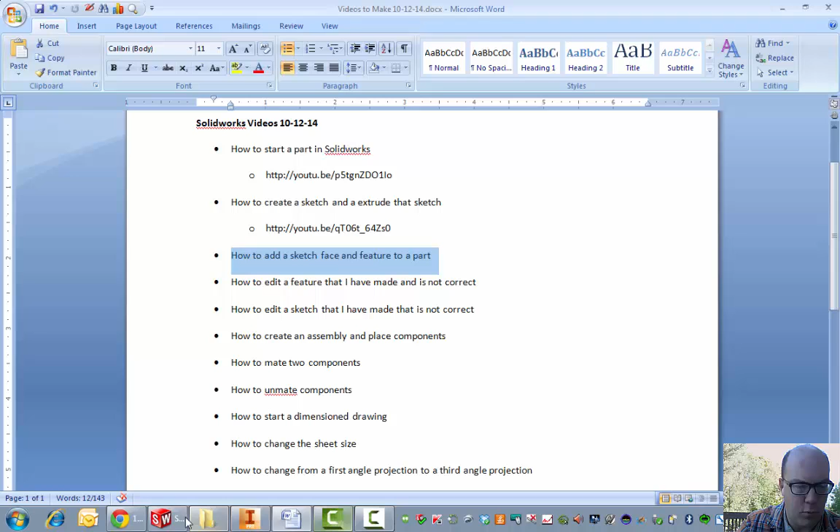Okay, so here's the third video we're going to talk about, and that is how to add a sketch face and feature to a part. Going to be pretty useful because everything you guys are going to do is not so simple as to do just a single face and then extrude it. You have to know that, but you're going to be doing a lot more things than that.

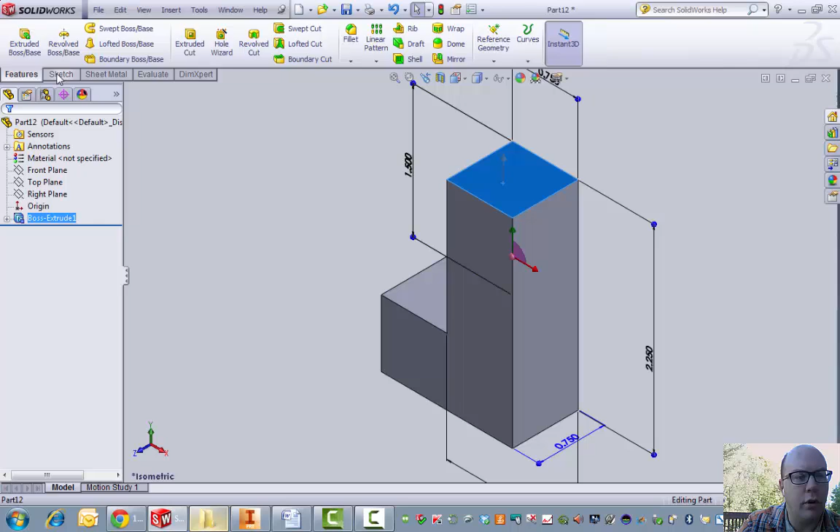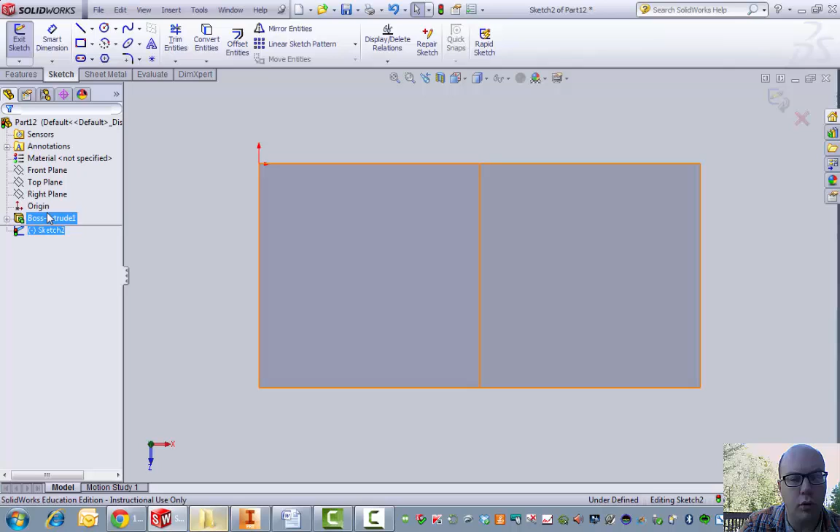So, first thing you want to do is you can click on a face, for instance, up here, and then we're going to click on Sketch right there. Now what we've done is, in our feature manager, in the design tree, we have an additional sketch. What that sketch is going to allow us to do is draw on that and then place different things on it. So one of the things I like to do too is right click, and then I will go Normal To, and you can see how it rotates the part and puts it right where you want it.

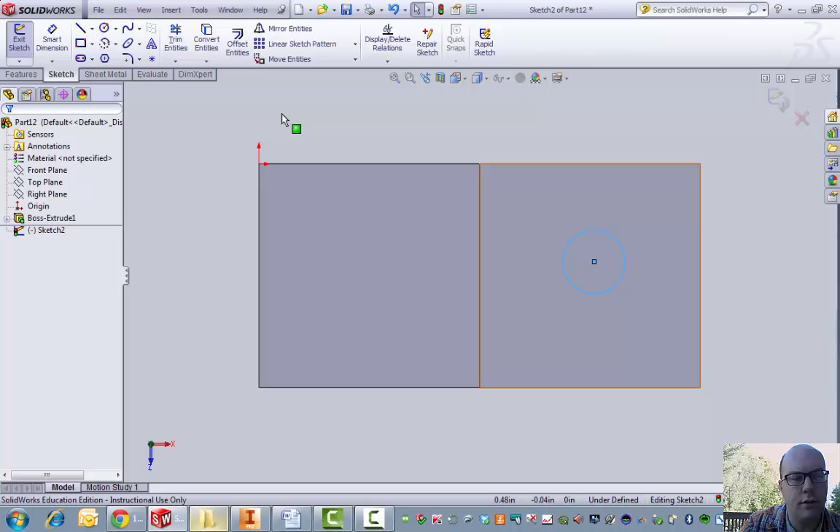So for instance, if we wanted to cut, bore a hole in it, one, you would need to know the location of the hole, but I'm just going to put a circle on here right now and then hit check mark, and it doesn't really matter where it is because I'm just showing you this feature here. And then what we're going to do is go to this extrude cut, for instance. Now with it I can go blind, I can go through all, for instance, and when I hit check mark,

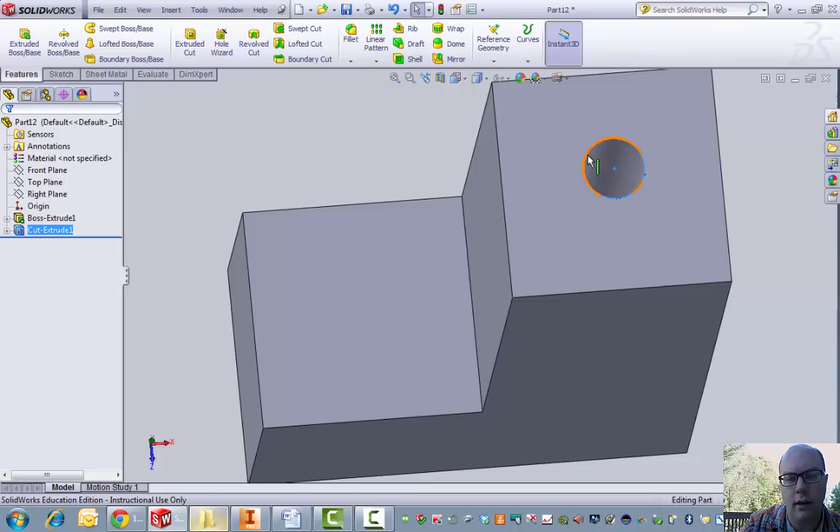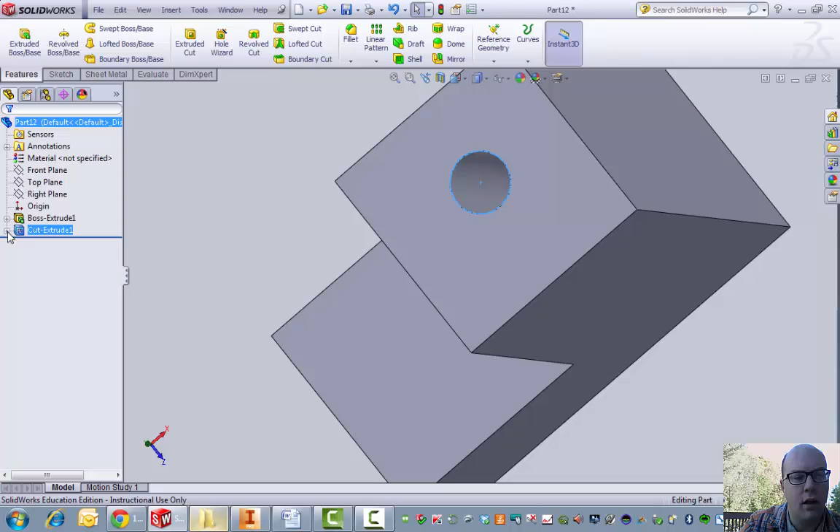now what we've actually done is created a feature on this face, and also we created a sketch and we created a feature. So the sketch has actually been consumed by the feature, the feature being the cut extrude and the sketch being what we did there. So that's one way to do it. Now here is another way, that's on the cut.

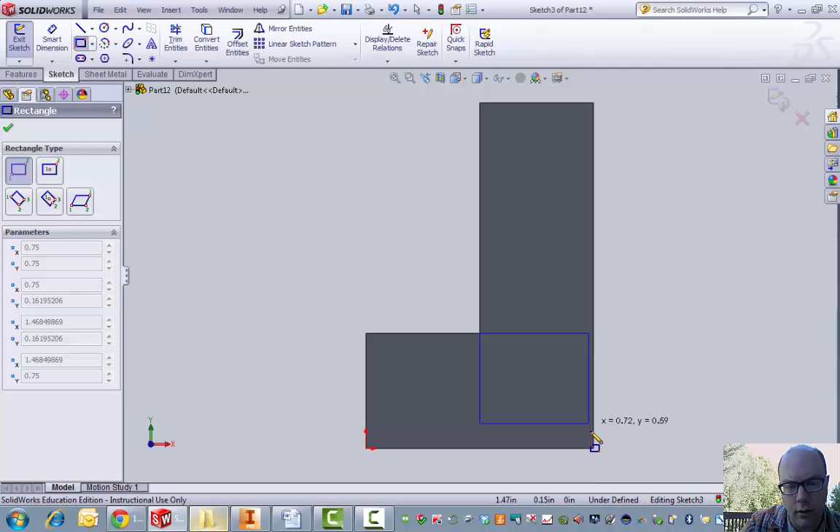What we can also do is if we extrude boss base again, and I wanted to add a feature to this face, so we're going to go Normal To again, and I'm going to add, let's say your puzzle piece wasn't quite that L shape, but it's got another shape, another piece sticking out right there. So that's going to be 3/4 by 3/4 from what we had before, and as you can see here, the 0.75 inches already shows up from before, and it's already extruding it. So for instance, your puzzle cube could have looked like this piece, correct? So that's how you're going to add that.

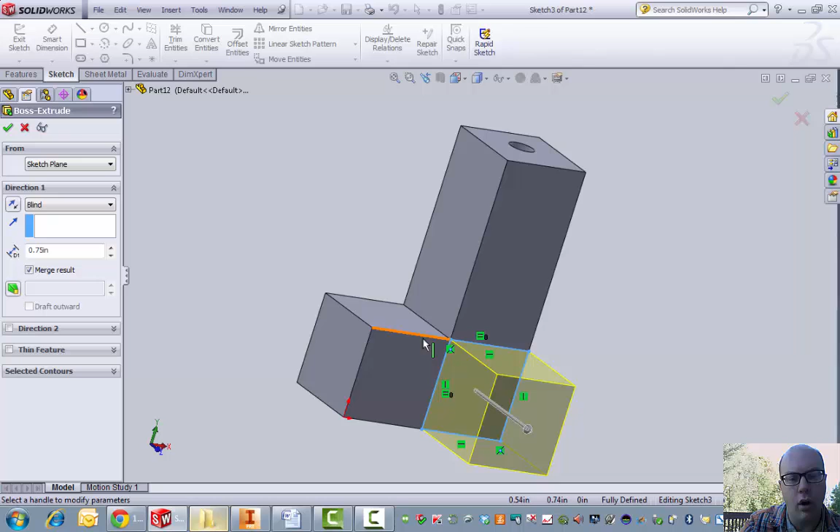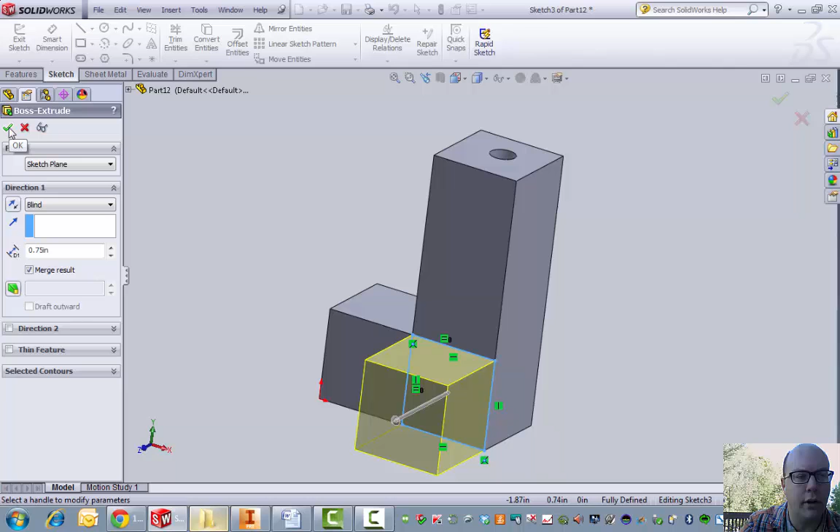And this is really going to be up to you guys on when you draw your part. Do you want to draw this face first? You could have drawn these faces and then added this. You have to determine in your head how you want to build that part. That's where the creativity really comes into play in SOLIDWORKS or Inventor or Creo, any other 3D modeling program. They all are basically the same.

So now you can see where we've added two different features, our cut extrude here, and when you highlight it you can see where it shows up, and then we've got our boss extrude here too. So those are things that will be extremely useful when you're starting to make more complex parts.